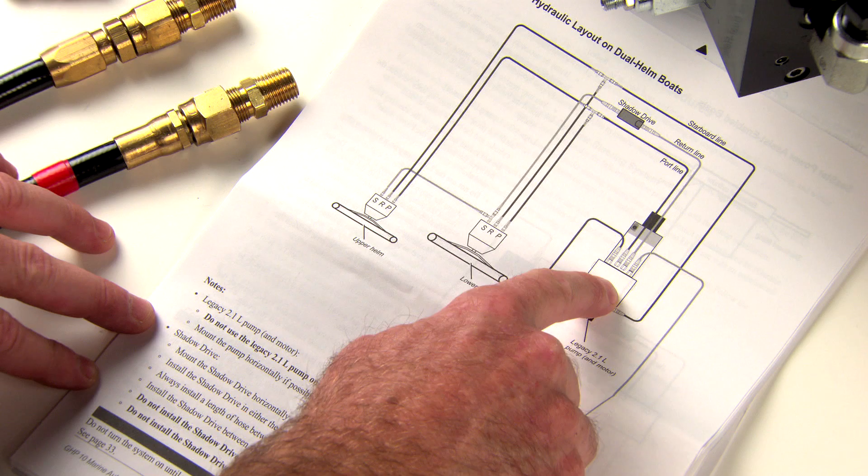Okay, let's take a closer look at the hydraulic portion of an installation. As noted earlier, be sure to first read the Garmin GHP 10 installation guide and preview the detailed instructions and helpful schematic diagrams included. Then, before mounting the hydraulic pump, you need to make sure that it's within 19 inches of the electronic control unit, so the connecting cables will reach. Remember, the length of those cables cannot be increased.

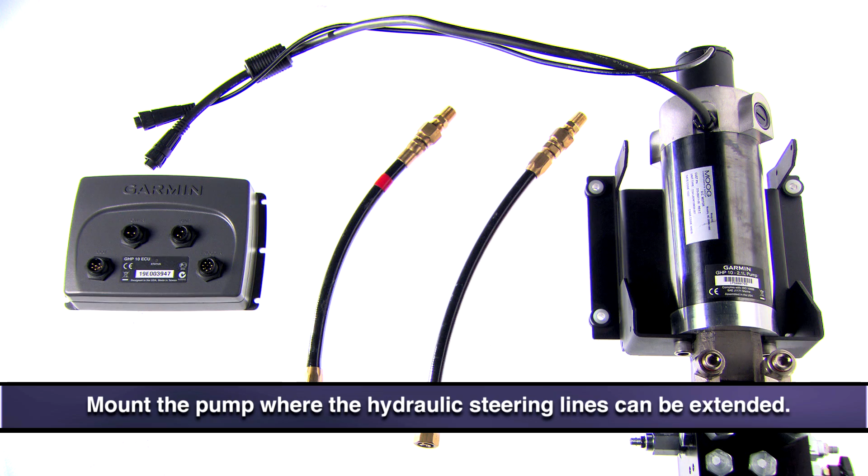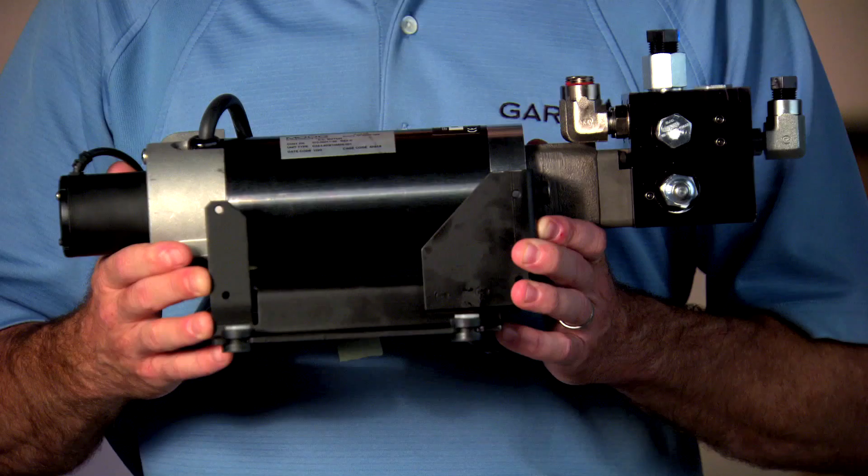Also, make sure to mount the pump in a location where you can extend the hydraulic steering lines of the boat. The pump should be mounted horizontally on a solid surface. A deck mount is preferred, but a bulkhead mount will work as long as the unit is positioned horizontally. Do not install the pump vertically with the pump head pointing down, as this will cause air to be trapped in the pump head and lead to improper operation.

Once you've determined the pump location, use the supplied mounting template to mark the pilot hole positions, drill and secure the pump with the mounting screws provided. Then connect the 2 wires from the pump to the connectors marked pump and encoder on the ECU. Now you're ready to connect the hydraulic lines.

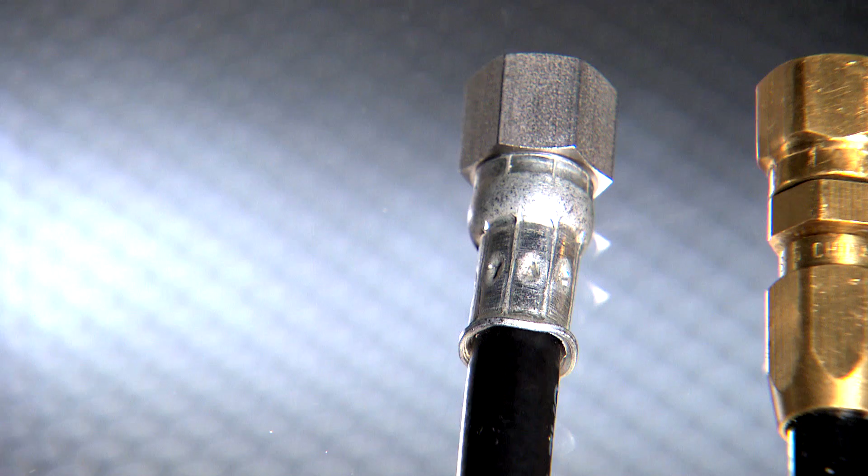Before disconnecting any hydraulics on the boat, be sure to follow the recommendations of your boat manufacturer regarding hydraulic hose fittings and installations. You must know how to properly prepare the hoses for removal and how to properly bleed the hydraulic lines of air once the system has been reconnected. If you need to add hydraulic hose to the steering system, be sure to use only hose with machine crimped or field replaceable fittings that meet the PSI pressure specs recommended by your steering system manufacturer.

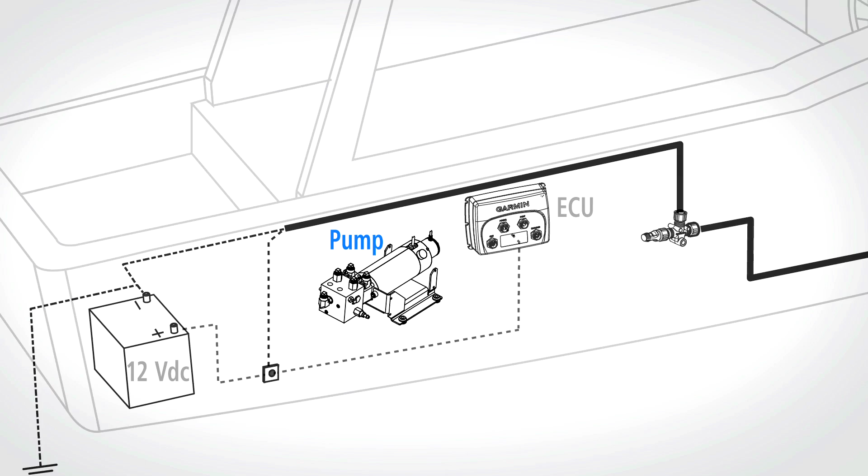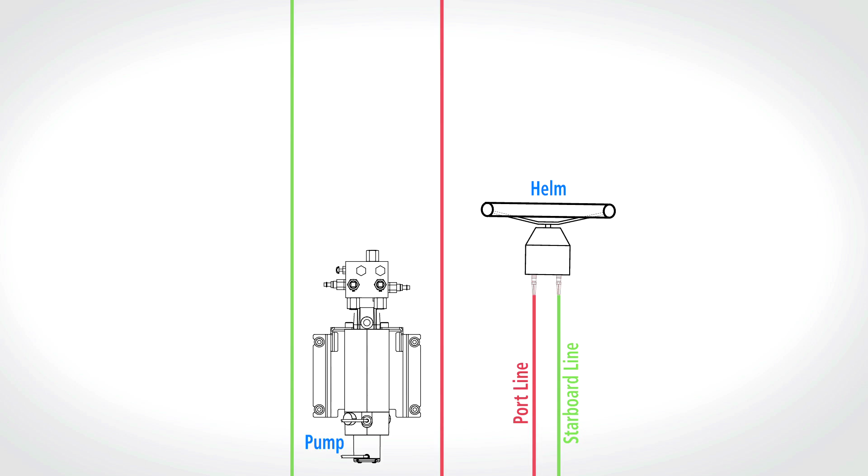On our most commonly used pump, the 2.1 liter, you'll normally mount the pump aft, near the rudder of your boat. Then, take the long port and starboard hydraulic lines already on the boat, disconnect them from the steering cylinder, and reattach them to the pump. Next, add 2 short hoses from the pump to the cylinder and create a longer return line to the helm.

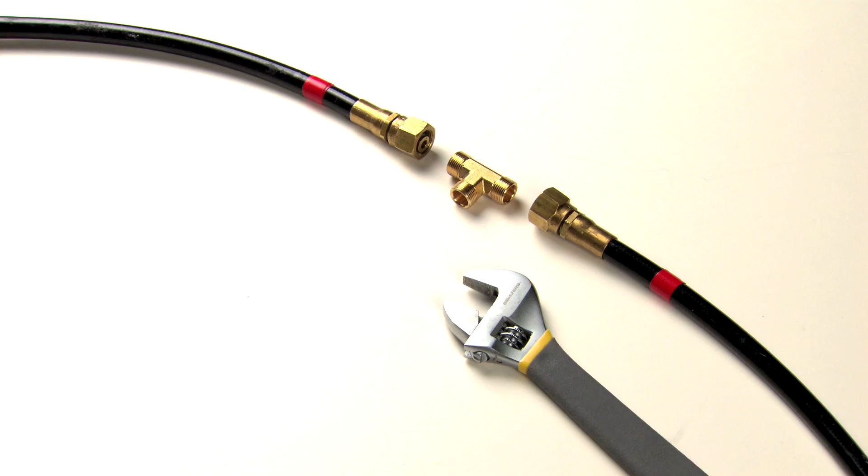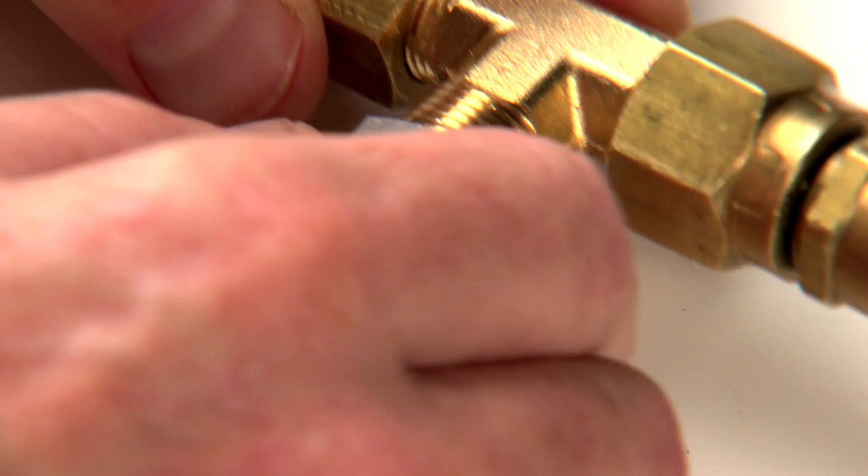Now let's take a look at the installation for our 2.0 and 1.2 liter pumps. For these, you'll typically tee off of your existing hydraulic lines and then just run a new return line from the pump to the helm. The 2 liter and the 1.2 liter pumps both have manifolds with upper and lower fittings to allow for different hose configurations. You can use the upper fittings, the lower fittings, or a combination of the two. Just don't use any more than 3 hose connections to the unit.

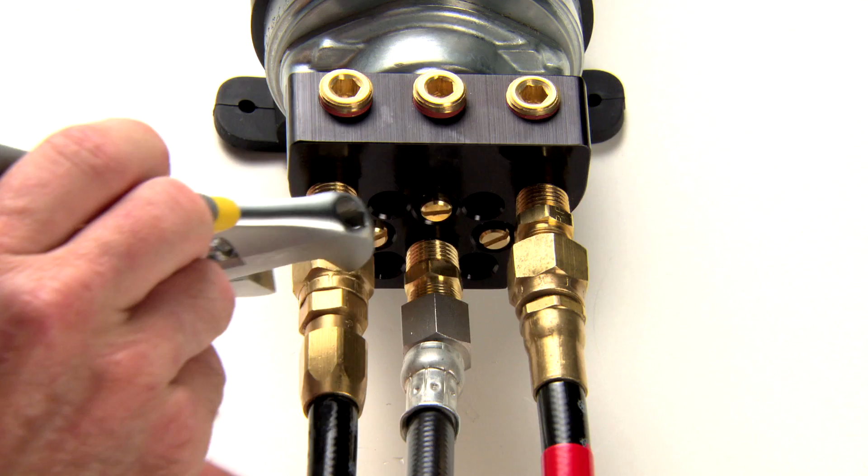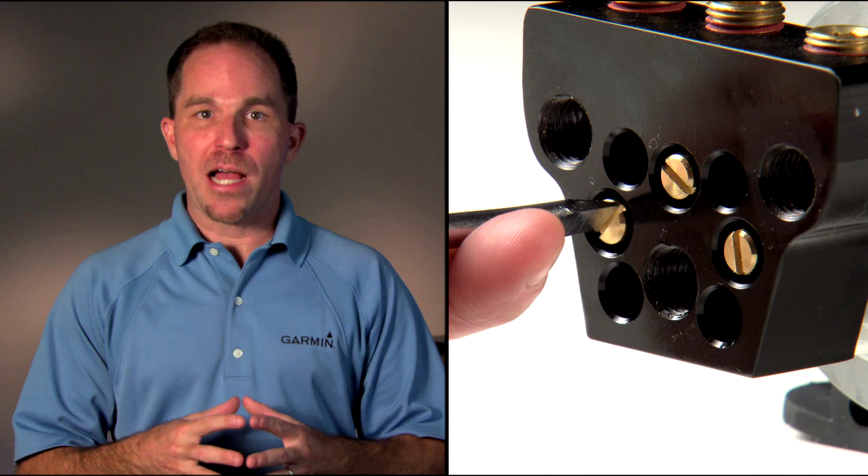Also, do not use thread sealing tape for any hydraulic fitting. Instead, a gel-type anaerobic pipe sealant is recommended. To simplify servicing, both the 2 liter and the 1.2 liter pumps also feature built-in shutoff valves on the manifold. To isolate the pump from the hydraulic system, you simply tighten the 3 brass screws near the lower hydraulic connectors. To reactivate the pump, just loosen the screws to their full open position to disengage the shutoff valve.

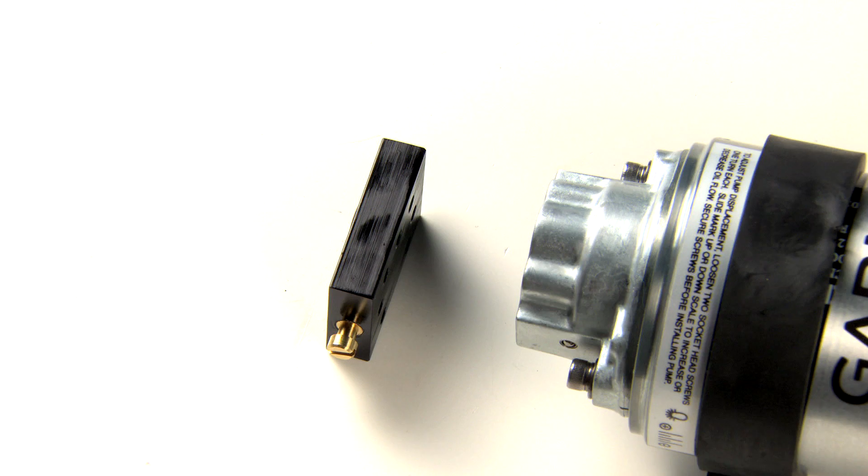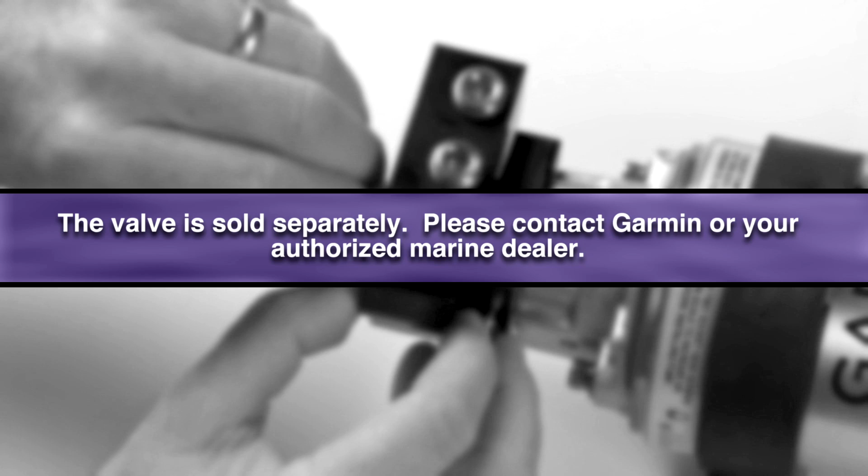If the steering on your boat uses an unbalanced cylinder configuration, you'll need to install an unbalanced valve kit on the pump. This valve allows the excess fluid from the larger volume side of the cylinder to bypass into the return line and even things out, hydraulically speaking. The valve kit is sold separately, and it's available by contacting Garmin or your authorized dealer.

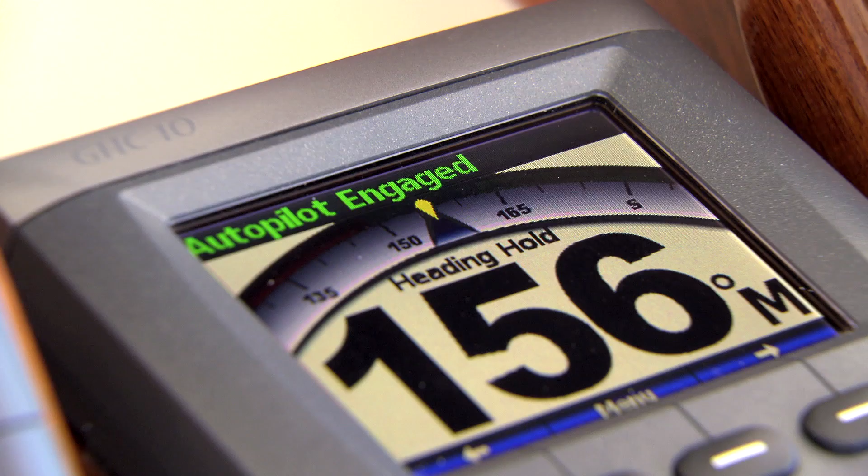Okay, now that the pump and hydraulic lines are connected, you're ready to install the Shadow Drive sensor that enables the system to automatically relinquish the helm whenever you want to hand steer, without disconnecting the autopilot. The Shadow Drive is a bidirectional, flow-activated switch. This means it can be installed in either direction and on either the port or starboard hydraulic line. You should mount the Shadow Drive valve horizontally and as level as possible behind the lowest helm station on your boat, if you have more than one.

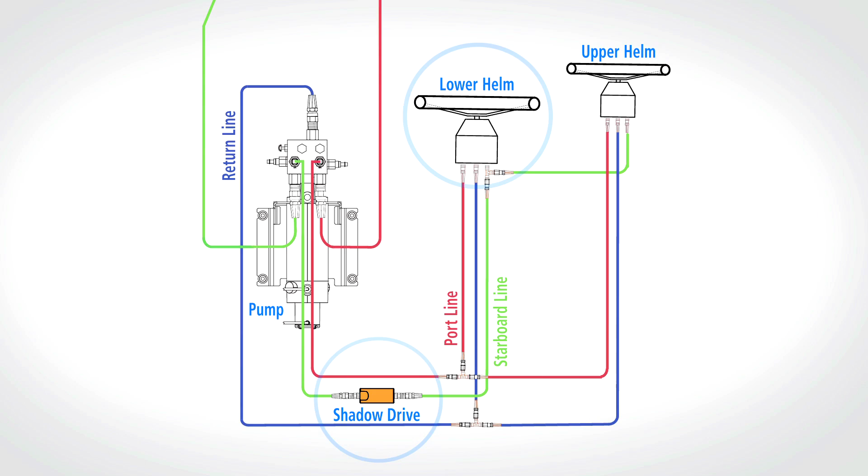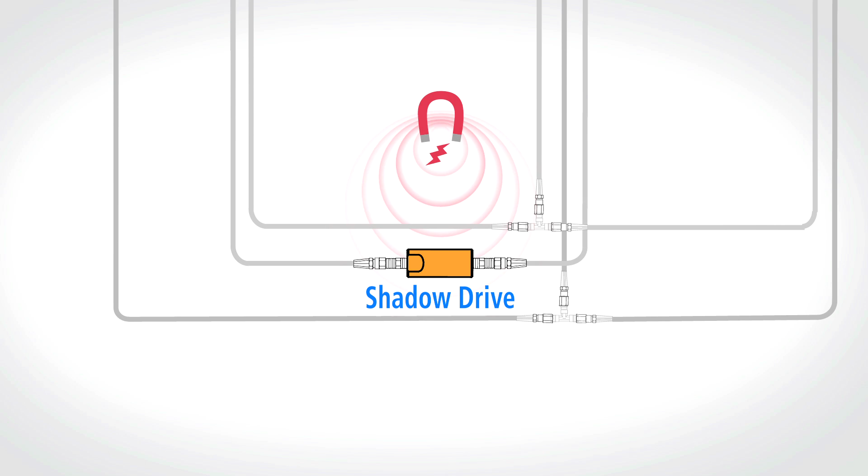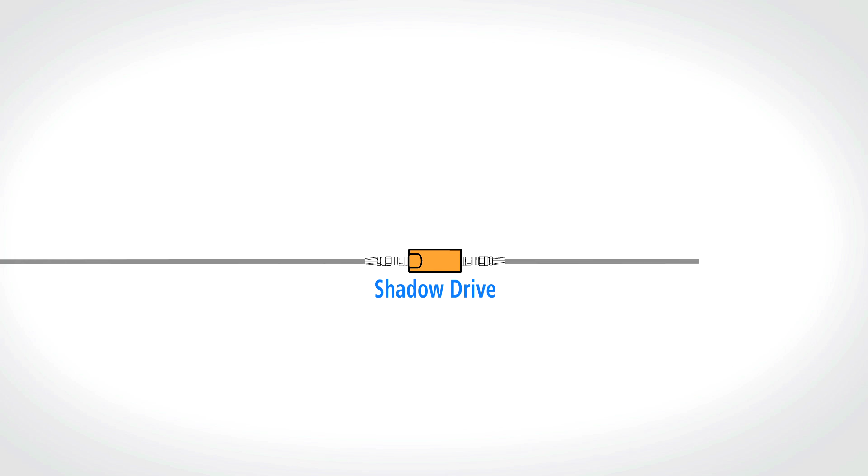Don't install the valve directly to fittings at the back of the helm. You'll need to install a length of hose between the helm and the Shadow Drive to ensure proper operation. Also, don't mount the Shadow Drive within 12 inches of any magnetic material, such as speakers and electric motors, including the autopilot pump. The Shadow Drive valve should be installed between the pump and the helm, but not between the pump and steering cylinder or power assist module. Also, if you have 2 helms, don't install the Shadow Drive between them. Put it behind the lower helm and below the level of the vented plug.

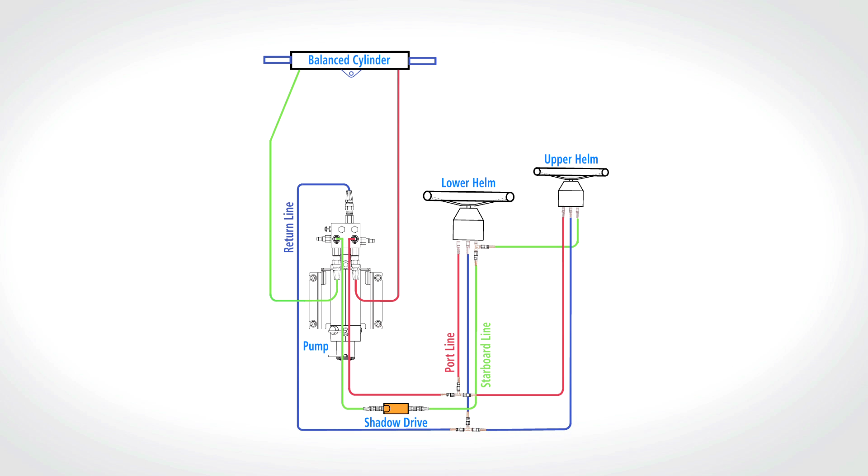When you've got all the hydraulics connected, don't turn the system on until you bleed all the air from the helm, the Shadow Drive, the pump, and all the hydraulic lines. Check your manufacturer's recommendations on proper bleeding techniques for your hydraulic system. That's it for now on the basic hydraulics of your Garmin GHP 10 Autopilot. In the next chapter, we'll show you the dockside wizard and how to configure the GHP 10.